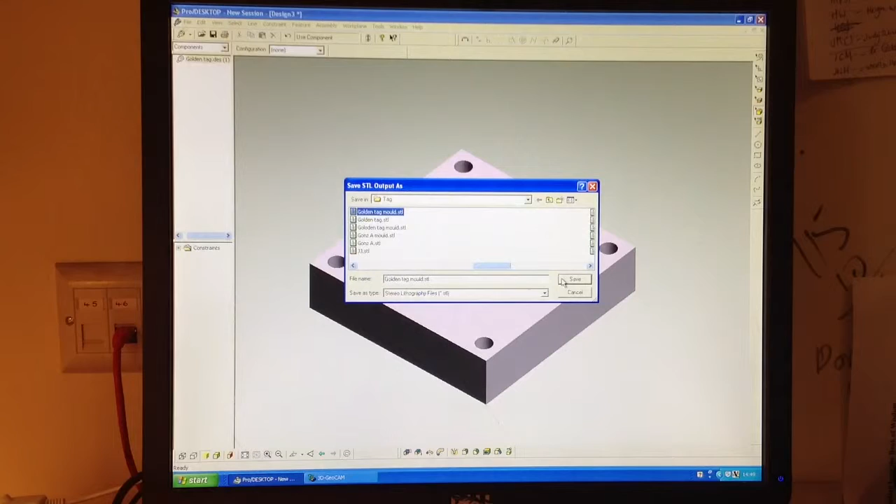It's not as simple, however, as just exporting this to one bit of software or straight to the machine. We actually need to run it through an intermediate bit of software. So I'm going to export it as a stereolithography file to start with, and make sure that it's given a good name. Golden tag mould it will be. Notice that it's got the STL letters at the end. Don't worry about the ASCII binary. Just press OK.

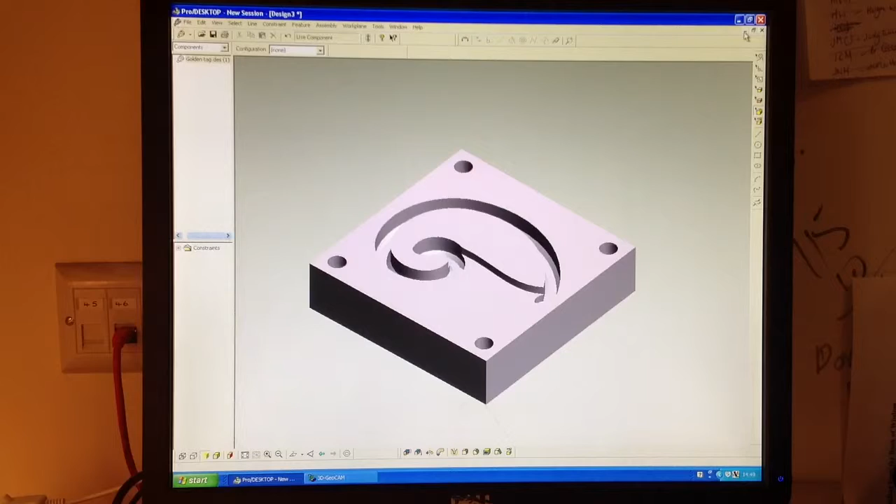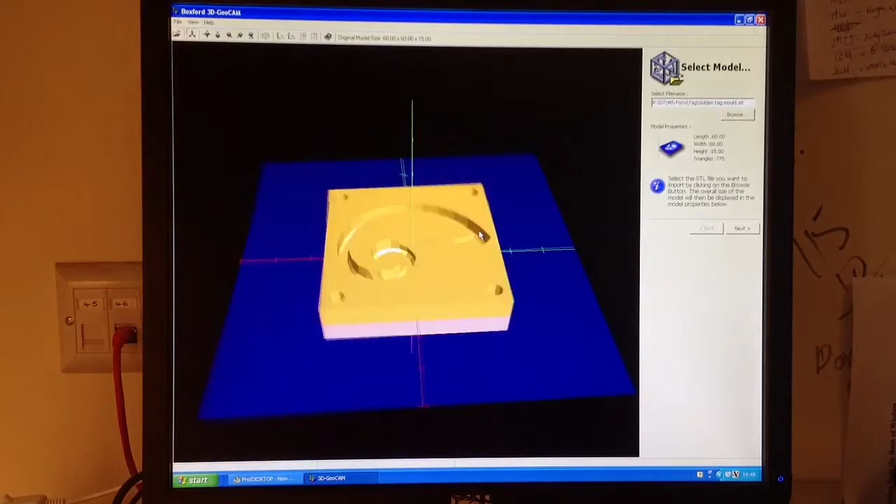Now, stereolithography is a resin that's cured by laser in layers, and actually we're not going to use that process. Like I said, we're going to use a CNC router, but it will recognise it. This next bit of software is called Boxford 3D GeoCAM, and I'm going to be finding that STL file that I've just made. There we go, golden tag mould, and opening it in here. Now, to move it around, I'm using the left mouse button and pressing it when I move it around, and you'll see that this 3D virtual shape appears.

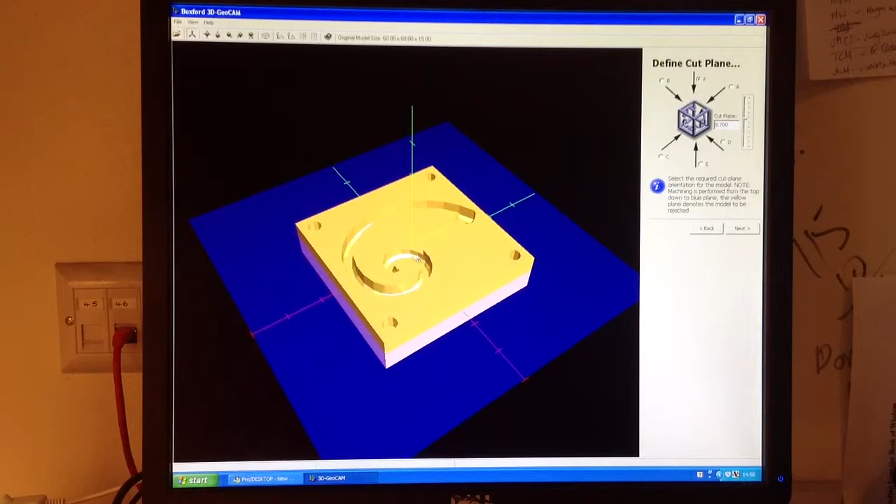Now, I'm going to work through a series, so that's the first select model sheet, as it were, slide. I'm going to work through about 10 of these before I get to the next stage. This first one represents the angle. I can cut from the other side, or from different angles in case it comes in the wrong direction. I can also change the cut plane, and you will need to play with this. If you look inside the bottom of the tag, you'll see at the moment it's coloured in yellow. Look at this little spot over here.

If I move the cut plane up and down, basically, if it's right at the top, for example, there's the cut plane right at the top, it's cutting nothing, or hardly anything. It's just that very, very top layer. Right at the bottom, it'll cut the whole lot. I don't need it to cut the whole lot. So I'm looking in this little area over here, and that's not quite far enough. I'm taking it down. There we go. So that's about 8.5mm below the top surface is where it's cutting.

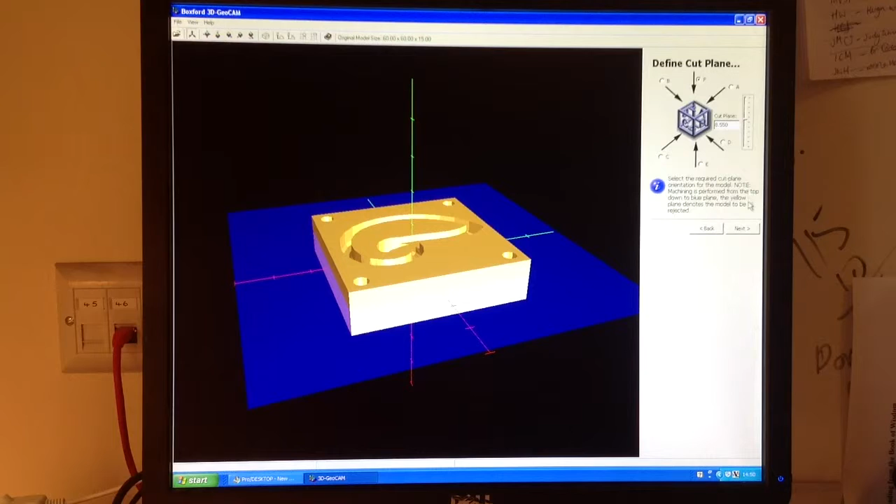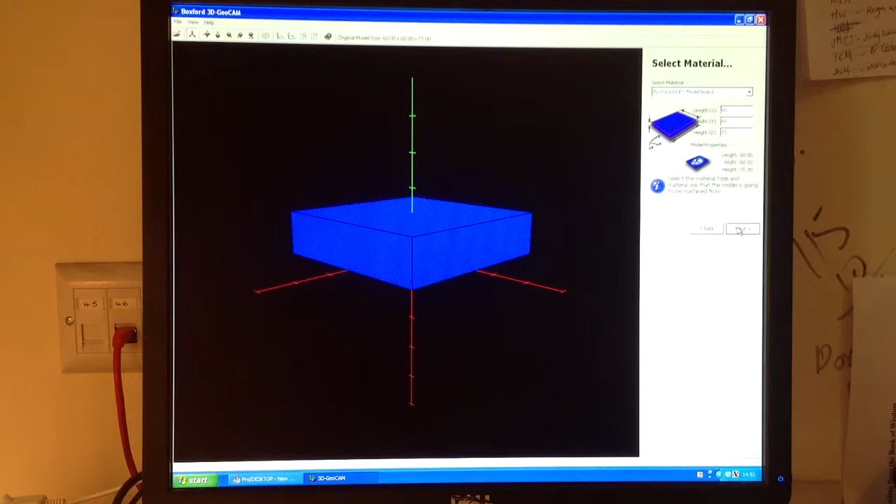At the moment, it's automatically defaulted to this Boxford model board, which is fine for MDF. It uses the similar sort of parameters, but the size of the model is 60 by 60 by 15. Unfortunately, the model board comes in these formats, so what I need to do is transfer those measurements across to the sizes up here. So all I'm going to do is just type in 60, like so, and move on. And now it should fit in. You can notice 100% fits the material. I shouldn't have any problems. You can scale it at this stage. You might want to go back and make it slightly smaller or larger, but we'll stick with this at the moment.

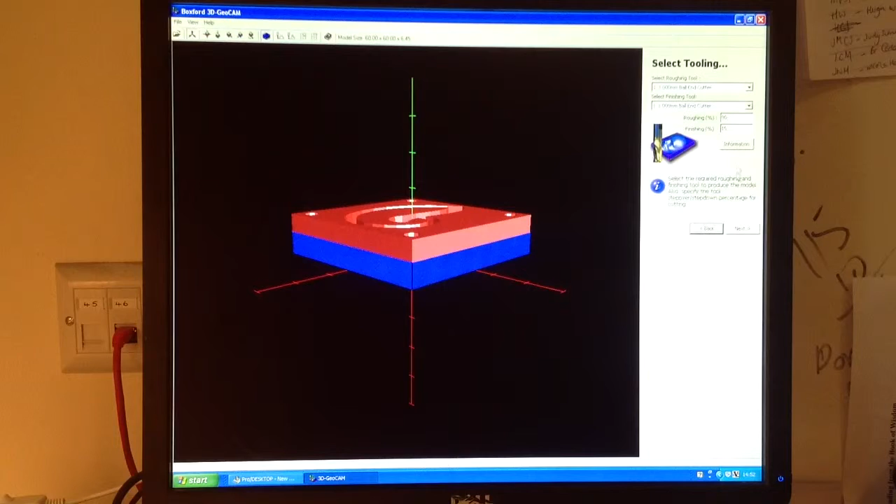I wouldn't worry about the model work shift, and the tool that we're going to be using is a 3mm ball end cutter, rounded cutter, for both roughing and finishing. The reason we've used the same tool for both is that we don't have to change it halfway through, and actually for this size of object 3mm is fine. We're going to do roughing and finishing. You don't need to worry about allowances, but there's no point in getting rid of all of this material. Notice this sort of red side here, there's no point in cutting that away.

And then we've got the roughing and finishing coming here. Roughing takes away a lot of material very quickly. And there's two different patterns in which it can do that: offset waterline and raster profile. You don't need to worry about the details of those, but we can come back and change them to see whether it makes it faster or more effective. I'll leave it at offset waterline, just as I'll leave the finishing at raster profile.

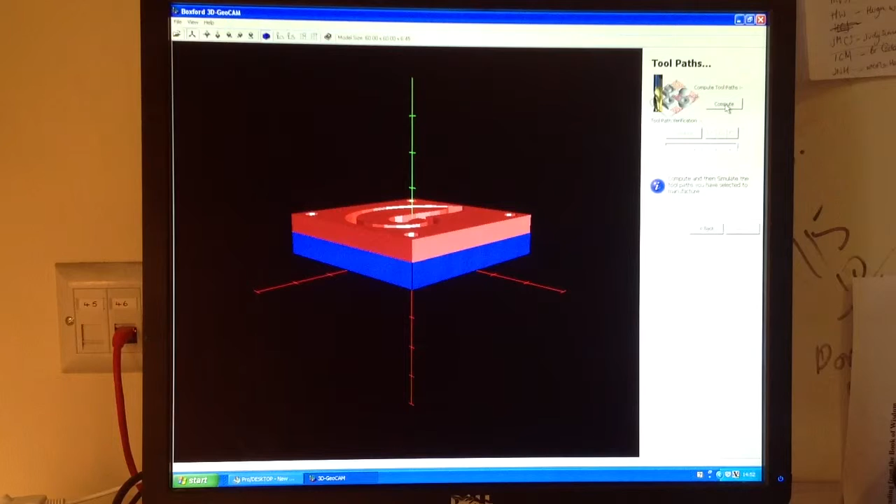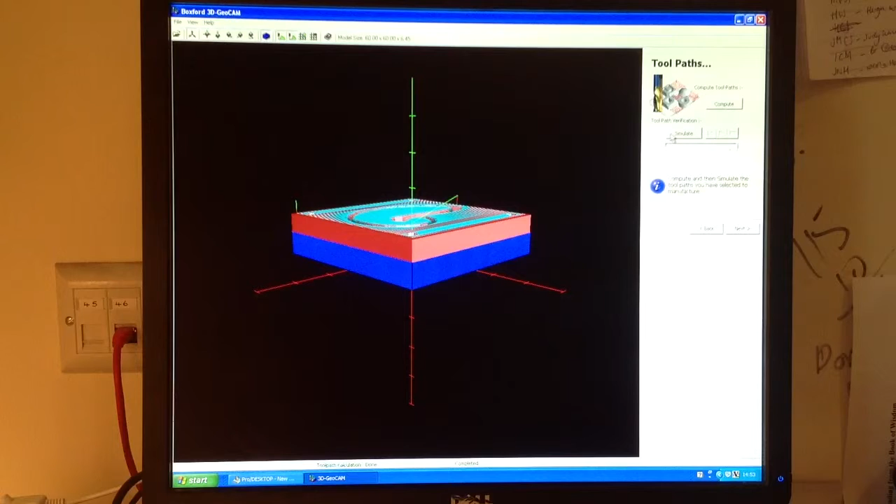This is virtually the final stage. I'm just going to let the computer now compute it, and you'll see what happens is a series of green and blue lines which represent the path along which the tool is going to be working. Now, these could have been typed in by hand, X 30mm, Y 30mm, and so on, with a particular speed for the router as it goes. This does it automatically. I just want to check that that's going to work though, so I simulate the whole process. I'm going to slow it down a notch, and you'll see the tool cutting that particular shape out.

Now, it's a little bit rough around here, although not too bad. But it's taken 15 minutes to do the whole process. I can go back and I can change the roughing to that. I'll change the finishing to Z level milling, and you'll see it recalculating the tool path in a different format. Simulate the process again, and it cuts it out like so. 5 minutes 59 seconds, great, but it looks really rough.

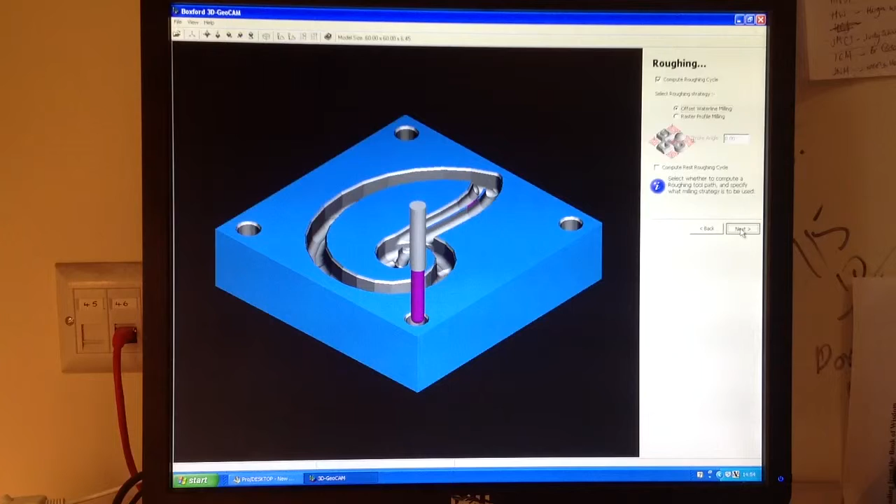I've got a bit of a problem here, it hasn't taken that away, and you can also see that slight purple section there which represents a collision, in other words a problem. This is the beauty of this particular bit of software. It's allowing me to trial a process without actually damaging anything or cutting any wood. So I'm going to go back and change it to combination milling, change that one to offset waterline, try it again, recalculates, simulate the process. Nice and neat, takes 19 minutes, but it looks good.

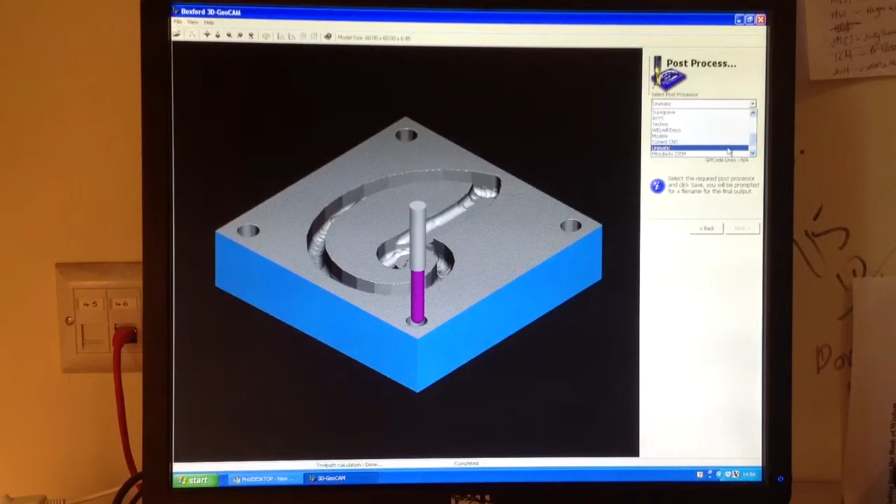I'm happy with that. I'm going to save that as it is, which is the next stage, and this is the post-process. So this is where it converts it into the code. There's a whole variety of different machines that we could output to. The one that we've got here is a Unimatic machine. Save it, and notice it saves it as an NCP file. At this stage, as well as saving it there, it might be worth saving it onto a USB flash drive so that we can take it across to the machine. And that's it, we're ready for the next stage.